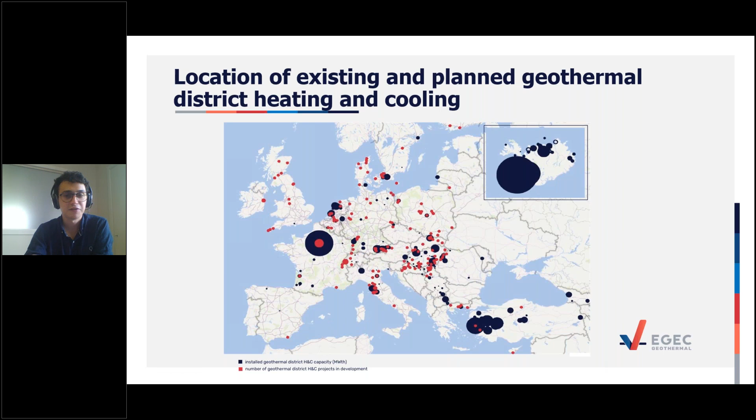So this is a very positive trend. Also, because of the COVID-19 pandemic, we could not report that many positive developments in 2020. A lot of projects were stopped or delayed, and there were very few projects that actually were commissioned during the year. But we can happily report broadly positive trends and diversification of the market overall.

Now, this diversity in the European geothermal market typically translates into a lot of different temperatures used in the geothermal heating and cooling sector. In several countries we have temperatures as low as 20 to 30 degrees fed into use for geothermal district heating and cooling. We can also have temperatures as high as nearly 170 degrees that can even be used for industrial processes. In between we have a whole range of applications - district heating, low temperature, higher temperatures. We also have uses in the agricultural sector for fish farming, etc. So a lot of different uses of geothermal energy.

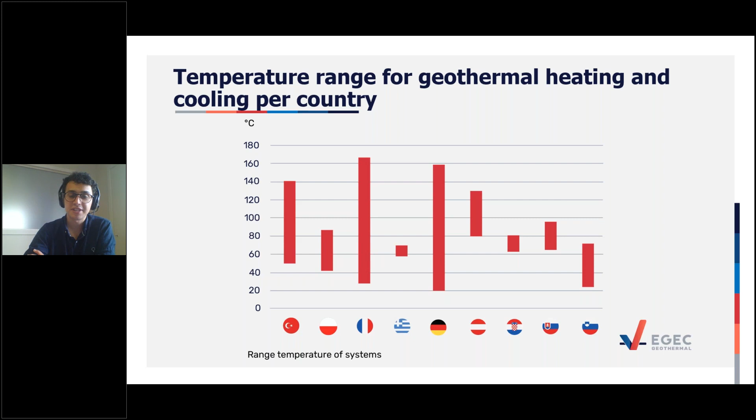We are seeing more diverse uses of geothermal appearing as well, exploiting a wider range of temperature and a wider range of depth. This was one of the observations we had in the previous EGEC market report - that really no depths and temperatures are limiting criteria, at least for geothermal district heating and cooling.

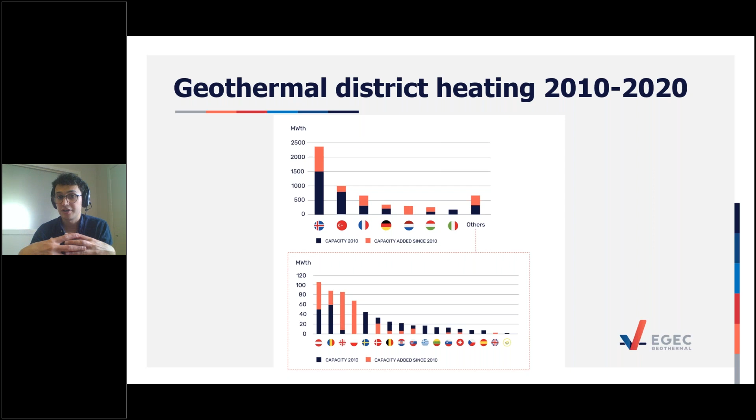What we see is typically countries like the Netherlands really appeared in this space. The Netherlands had very little use of geothermal district heating and is now the fifth largest country in terms of installed capacity and use. Netherlands is quite interesting because capacity factors for geothermal heat projects are quite high, as it's almost exclusively used for agricultural greenhouses. Therefore the plants are running almost 24/7, contrary to district heating and cooling for buildings, where typically we follow the heating loads, and in summer there's less demand.

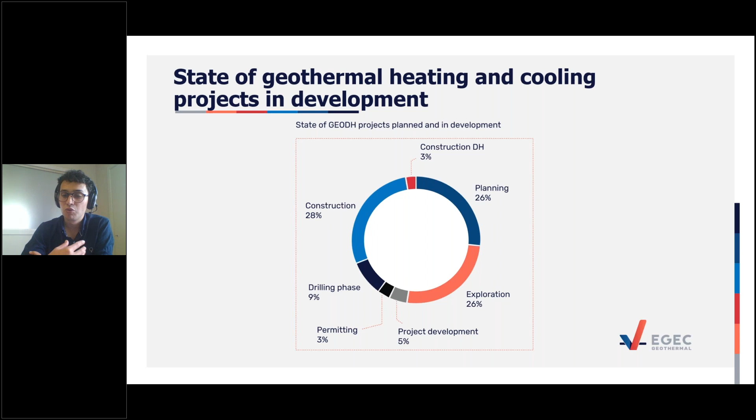So what we really see is that we have means to accelerate planning, exploration, and especially permitting to facilitate the development of projects and accelerate deployment of geothermal projects. What we expect over the coming years, if things go smoothly without disturbance like we had in 2020 and to some extent 2021, such as COVID-19, if we have the right policies and adapt permitting and planning for geothermal district heating, we might see a very rapid doubling of deployment rates for geothermal district heating and cooling, which might still increase at the end of the coming decade.

Now looking at geothermal heat pumps, we'll try to accelerate because time is running out a little. But we had a market that was not quite stable. We have seen a lot of decrease in several countries, typically Poland, with a 14% decrease in sales between 2019 and 2020. This is also true in some other European markets. However, the overall geothermal heat pump market remains quite strong, with about 90 to 100,000 units sold in 2020, bringing the total number of heat pumps installed in Europe to over 2 million, about 2.1 million geothermal heat pumps.

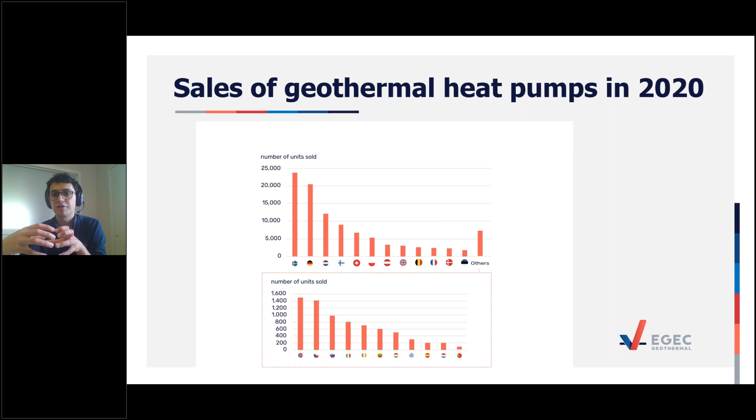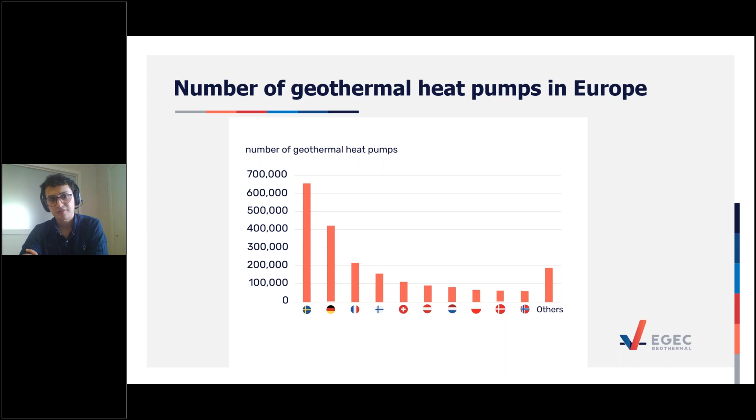What we see really is that very few countries are concentrating the bulk of sales and the bulk of installed stock of geothermal heat pumps. So of the 2 million heat pumps installed in Europe, we have half of them between Sweden and Germany. And what we are seeing is that all those markets have doubled over the past decade. We used to have about 1 million heat pumps in 2010, and we now have more than 2.

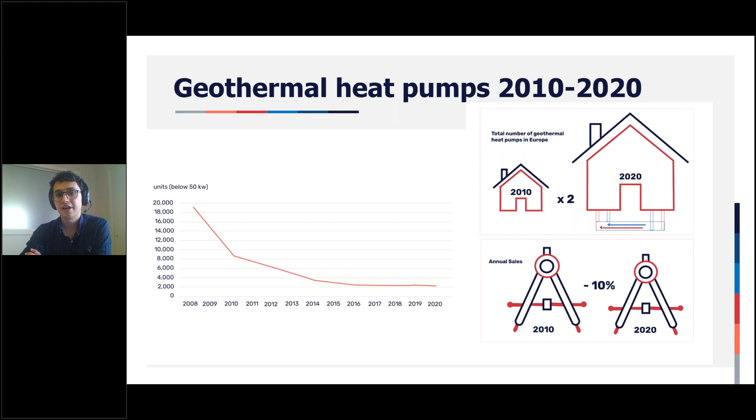Really what we see is that this collapse of the geothermal heat pump market in France was due to regulatory changes, unforeseen changes, and a lack of stability in the permitting and support framework. So really, policy decisions and support schemes have a strong impact on the viability of the market, and its capacity to sustain itself and consolidate until it reaches maturity. Another example, as we will see a little later, is Sweden, where on the contrary we have had a progression of geothermal heat pumps towards strong market maturity, high penetration rates, and a consolidated industry.

Now looking also at the trends in the way we install geothermal heat pump systems, we are typically drilling fewer wells. This is data from very large heat pump systems, so it might not translate directly to individual household heat pumps, but it's probably a general trend that we are drilling deeper wells. We used to have wells at about 100 meters deep; now they are typically 250 meters on average. And we used to have, for the same type of installation, about 200 wells, and now we drill less than 100.

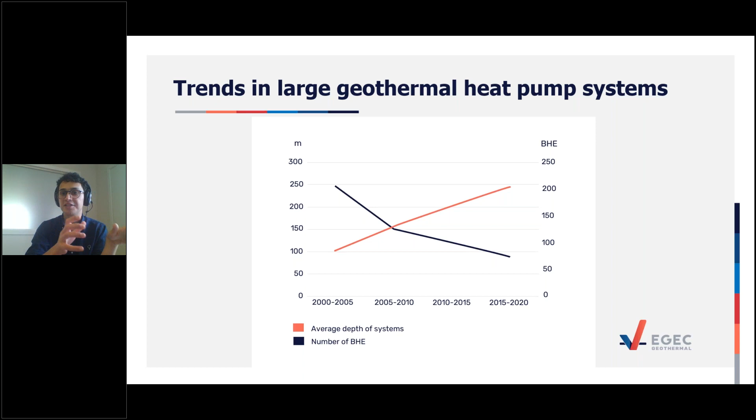So we see this shift towards deeper and fewer wells, which probably translates into it being much cheaper to go deeper and drill fewer wells, because you do not have to move the pad, etc. This means we drill faster and more efficiently, therefore decreasing the cost of systems.

This is a reflection of the importance of policy in really driving the geothermal heat pump market. So we had Sweden and Germany as the only countries that really either exceeded or are close to achieving their 2020 geothermal heat pump deployment targets adopted as part of the EU Renewable Energy Directive implementation. These countries are among the biggest markets for geothermal heat pump development, and also the countries with the highest degree of maturity because there was some degree of stability.

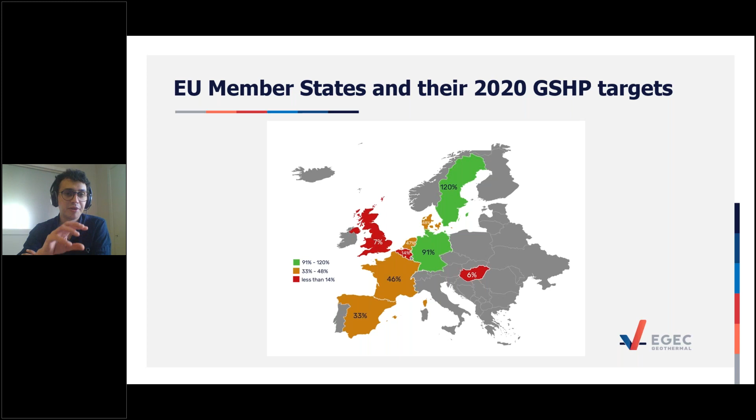Germany's market also was not as strong as in Sweden, but still, despite similar early trends at the beginning of the decade with France, Germany remained a more stable geothermal market.

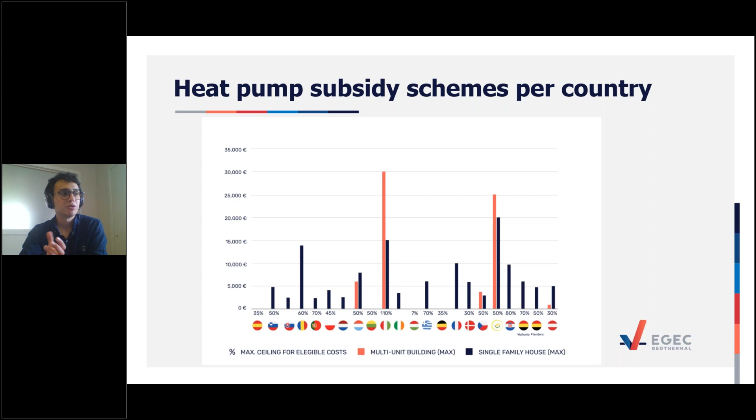Now these slides present a bit of the subsidy schemes available per country. What we can see is really it's quite diverse. We have some countries that tend to prefer focusing on multi-unit buildings, typically apartment buildings, hospitals, etc., and others that prefer to focus on single family houses. Some countries have both. We have very varying rates of coverage of the cost of the geothermal heat pump, so we don't have a very unified framework in Europe, which translates also into a market that is not quite consolidated.

Now, if we look also at penetration rate for geothermal heat pump per household, what we see is really strong differences between countries. A lot of European countries have fewer than 1% of households equipped with a geothermal heat pump. Even countries with quite an important installed stock, such as Germany, have only between 1 and 2% of households actually equipped with a geothermal heat pump.

Then on the contrary, we have countries like Sweden or Finland, where we have between 6 and 12% of households with geothermal heat pumps - 6% for Finland and 12% for Sweden - which is quite a high rate of penetration and really a highlight of the maturity of this technology, especially in a country where we have a lot of district heating, therefore limiting the number of individual systems.

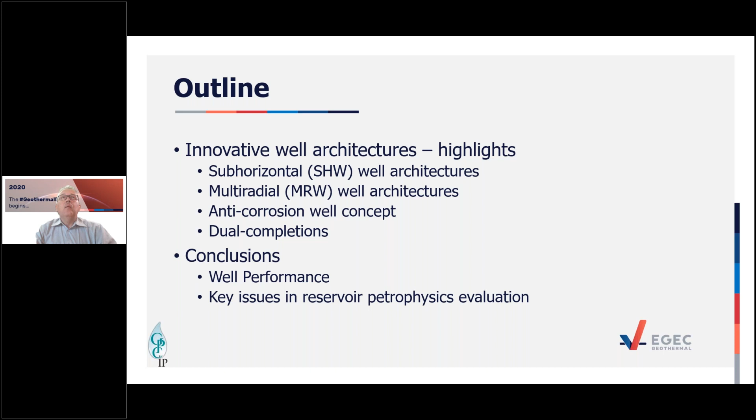So we need to exploit simultaneously two types of reservoirs. In the conclusions, I will tackle well performance and key issues in reservoir petrophysics evaluation, which is related to drilling. However, it's often neglected while developing resources in deep sedimentary basins, because most of the time we assume that we just cross the sedimentary basins, and then we just harness the geothermal resource which is beneath the earth.

Here is a summary slide of all the well architectures which have been promoted in the past. I have not spoken of the classical two vertical wells drilled from two different platforms, spaced at a certain distance in order to avoid thermal breakthrough. I'm starting this summary by presenting the classical deviated wells, drilled from a single platform, intercepting the reservoir at vertical depths between 1600 and 1700 meters, with either an open hole completion characteristic of the Dogger reservoir, or a wire wrap screen completion, more characteristic of clastic reservoirs.

At the bottom of the screen, you will see the first ever achieved concept of a subhorizontal well, which I'm going to detail later. On the right hand side, you will see the design of the multi-radial wells, recently achieved in France by another operator. We have done some work on design, though not specifically the way it has been achieved. I'm just giving you an example.

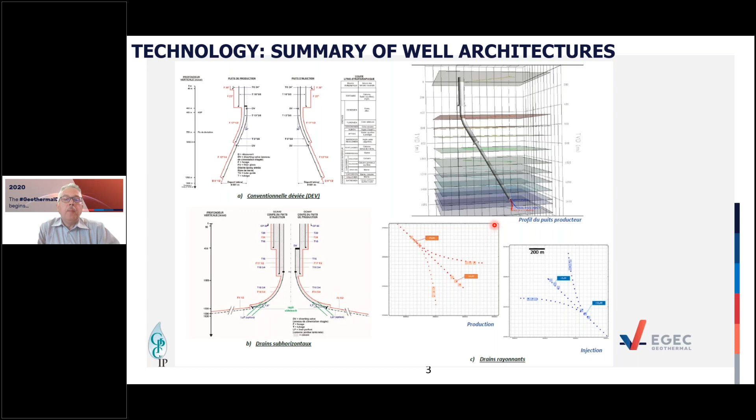Why do we need a subhorizontal well when we already have had an exploitation in the Paris Basin, in a Dogger Bathonian reservoir, which is very productive but exhibits zones with lower transmissivity, below 10 Darcy meters? The objective of this project was in the south of Paris, in Cachan, which is already surrounded — you can see all the doublets surrounding the Cachan perimeter. We are already very crowded, and it was necessary to design new wells in order to replace the existing wells, which were producing since 1984.

This district heating system was supplied since 1984 by geothermal heat, from four wells — that means 2 doublets, having a capacity of 360 cubic meters an hour in total of heat supply.

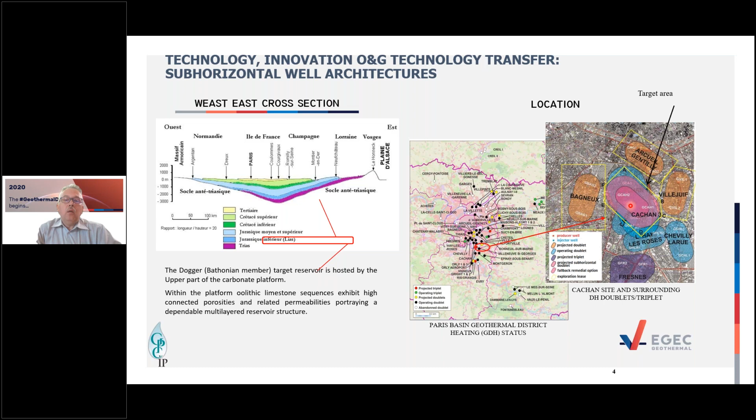By achieving a new subhorizontal well — here you can see the well design, the well construction profile, and on this side the trajectories and azimuths, and on this side the offset well trajectories and the design ones. This is the modeling which has brought us to what has been achieved.

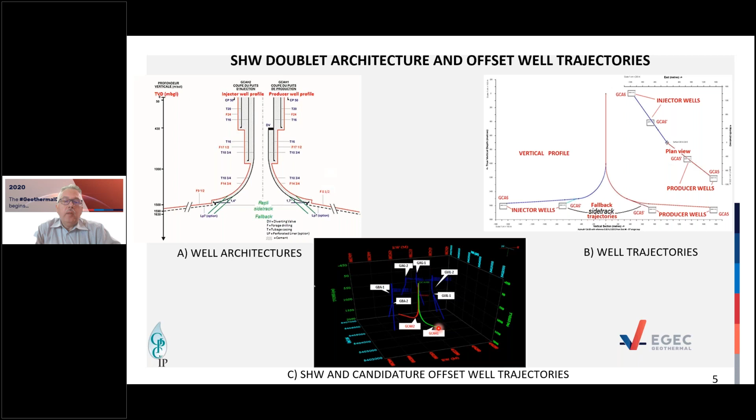The objective was to replace the 2 doublets with one single doublet, and this was carried out successfully by adopting a strategy where, for the first well, we used a constant angle trajectory of 84 degrees, monitored by logging while drilling, by XRD and XRF analysis, by mud logging, and then we applied geosteering. That means we had to keep the tool in the same layer for a while in order to increase the inflow surface into the well.

So, by what our fellows from the oil and gas industry achieved, this proved to be very rewarding, because today the doublet is producing at 450 cubic meters per hour, which exceeded the capacity of the 2 existing doublets, with a reasonable capex.

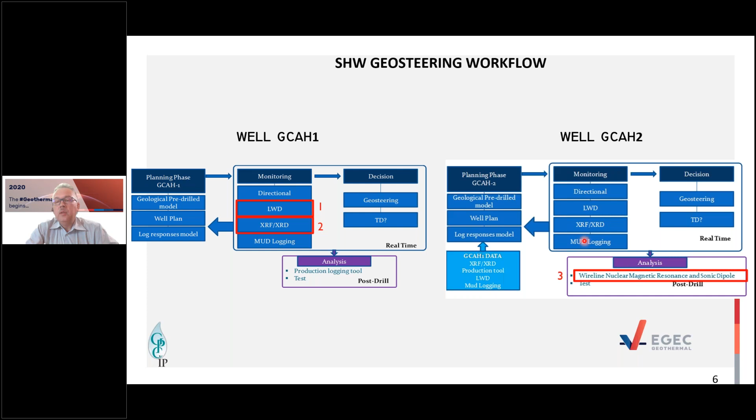The second well was much more tricky to drill because it was going the opposite way, uphill on the dip. The planning and geosteering of this well was much more complicated because we had to keep the tool in metric-sized layers for a long time, and it was the most challenging well because the transmissivity was even lower than in the production well, and it was meant to be an injection well.

So we succeeded well on the production well, but then the question was how to geosteer the second well, which was much more sensitive, in a way that it could take off the production from the production well, so as an injector. We had varying angles between 1 and 5 degrees, and had to track layers of metric size. In total we had 32 variations of angle and dip by geosteering.

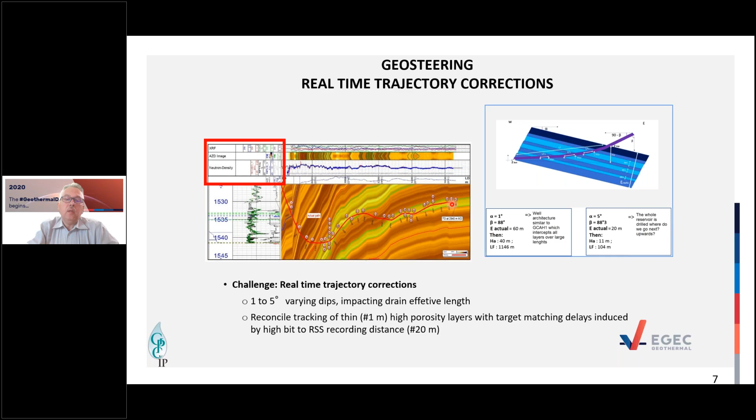That was the first ever thing done in geothermal in the Paris Basin, where we had quite good knowledge, but not sufficient to do that.

Of course, after doing geosteering, we need to do very good reservoir petrophysics characterization. This was done by Schlumberger on this project, and here is the flow chart of how to go from drilling and geosteering by good analysis of nuclear magnetic resonance, which gives broad information about rock quality, productive segments, porosity and permeability, and rock heterogeneity. This was really a rewarding exercise, which brought in a wealth of data.

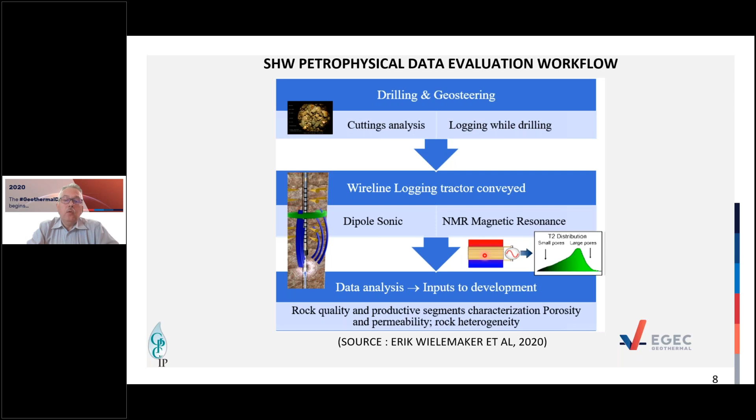For future projects, and how to do them successfully by successful geonavigation and reservoir characterization in order to maximize heat production. Well, the second example will come in presenting the multi-drain concept, where we could demonstrate, as you could see on my previous slide, that we have had a conventional single drain.

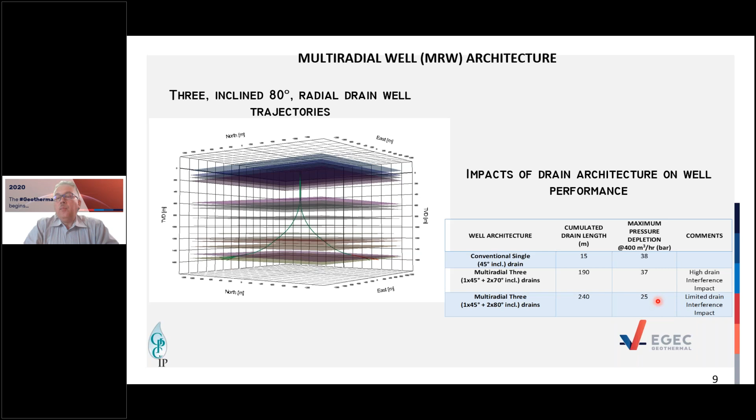This would give an accumulated length of 15 meters with pressure depletion at a high flow rate, also in a very low transmissivity, below 10 darcy meter environment at 38 bars. For a multi-radial three drain system, with one drain at 45 degrees and two at 70 degrees, we would just have a 1 bar gain, but an accumulated length of 190 meters. Should we keep a constant angle of 80 degrees and achieve an accumulated drain length of 240 meters, we would gain approximately 12 bars in pressure depletion, and also have a limited interference impact, as shown in this modeling exercise of multi-radial well versus conventional well architecture performance.

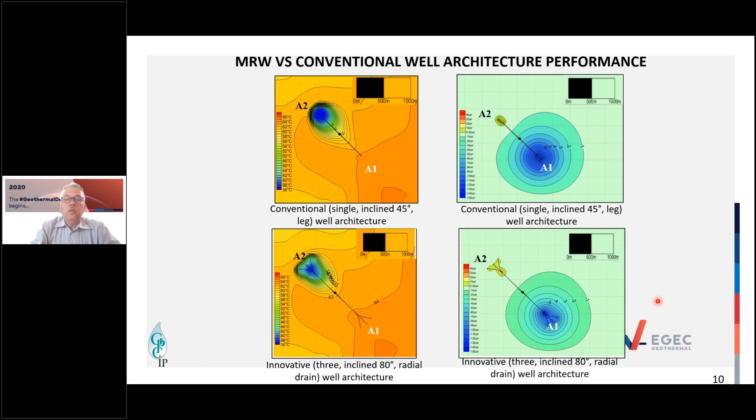Well, a similar architecture, not exactly the one shown to you, has already been achieved in France, which is not yet in service. So I cannot report on that because nothing has been disclosed by the operator so far.

Well, the other innovation, I would say, dates back now 26 years. The first well, the anti-corrosion well concept, was achieved in Melun-l'Almont. It was a fiberglass relined well, drilled as a conventional well with steel prop casing, but in a large diameter, and inside we introduced a fiberglass liner, which is not cemented. It is in free suspension on the lower part and in compression on the upper part.

And the precursor, which I mentioned from 26 years ago, had only one casing, and in 2018 we achieved a replica of that well, but with a pumping chamber. The result was that the well performed so well, and the pressure losses were so low in the fiberglass, that the pump was no longer needed.

However, just to give you a comparison, the old well, which was in production in Bonneuil-sur-Marne at that time, was capable of giving 150 cubic meters per hour. Now the new well, the fiberglass completed well, gives 280 cubic meters per hour from the same reservoir. The distance between the impacts is about 100 meters, so we have targeted the well at the same place.

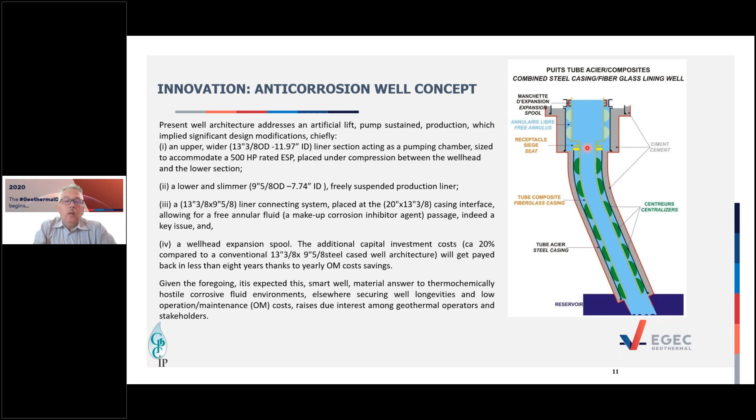Well, the advantage of this well is that it's a zero maintenance well, and it does not need a downhole chemical injection line to protect the casing from corrosion and scaling, as is the case in many wells, not only in France but also in Europe, and it can last for a very long time, as already proven in practice. This well was put into service in 2018, and it has operated stably since then.

So, of course, the production of these two waters is not going to be mixed; each water will give its own heat to its own heat exchanger, and it will be reinjected into the well, into that respective reservoir.

The only problem today with these reservoirs, the Albian and the Neocomian, is that they are clastic reservoirs and they exhibit quick clogging. That means the injectivity of these wells degrades very quickly due to particle migration and internal cake formation. A research program is ongoing on this topic, and we are confident that solutions will be adopted soon.

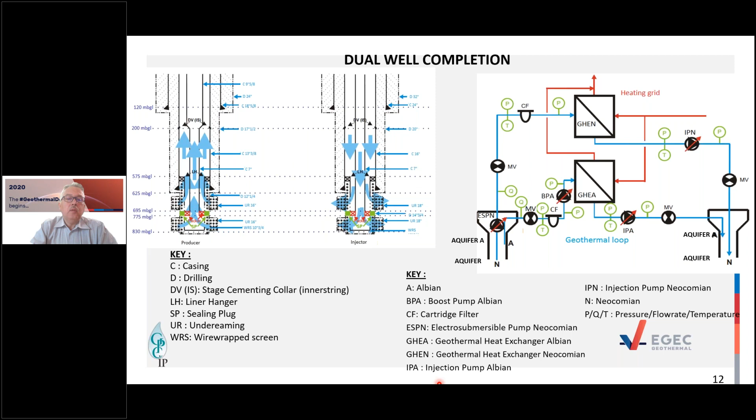This is another technology borrowed from the oil and gas industry: the expandable liner. More and more we have to target deeper reservoirs, because existing reservoirs either lack sufficient productivity, or we need deeper reservoirs to complement the heat capacity of the existing reservoir with one that has higher temperature.

This has been a design which has been designed and almost executed - I must say almost, because there was a technical problem and it could not be achieved - to exploit a deep reservoir, the Triassic sandstone reservoir in the Paris area, and also give the opportunity to exploit it by a dual completion.

The idea was to put an expandable liner in order to maintain the same diameter between the completion of the Dogger reservoir and the top of the Triassic reservoir, so we would not lose diameter and not lose flow rate, because reducing the diameter of a well causes loss of flow rate.

What we should retain from geothermal exploitation is that we are not producing via tubing, we are producing by full bore from every reservoir, and the geothermal water is in contact with the casing. Therefore, well integrity is crucial.

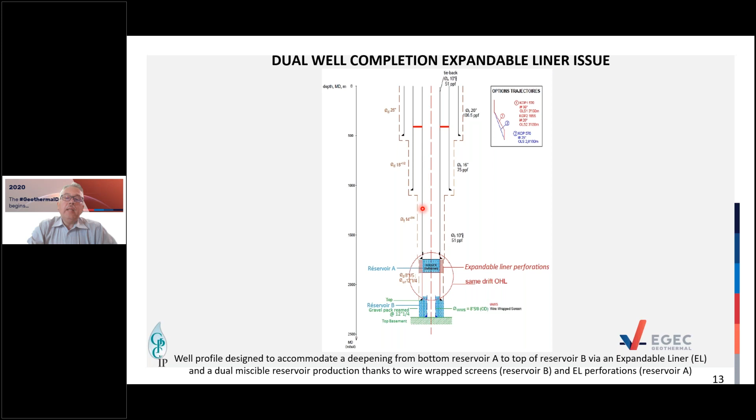This is the application which has been designed through the expandable liner solution, but it has not been implemented because this exploratory program did not succeed.

We worked closely with Schlumberger to have dual production from the Dogger and from the Trias. There have been two systems proposed: the dual parallel and the dual concentric electrosubmersible pump. This has been a big challenge because it has never been done - it is very often done in oil and gas, but never in geothermal.

For this target flow rate, we were targeting 450 cubic meters an hour: 150 cubic meters per hour from the Trias and 300 cubic meters per hour from the Dogger. Achieving this with two pumps, mixing the waters, was quite a challenge for all the designers involved in this project.

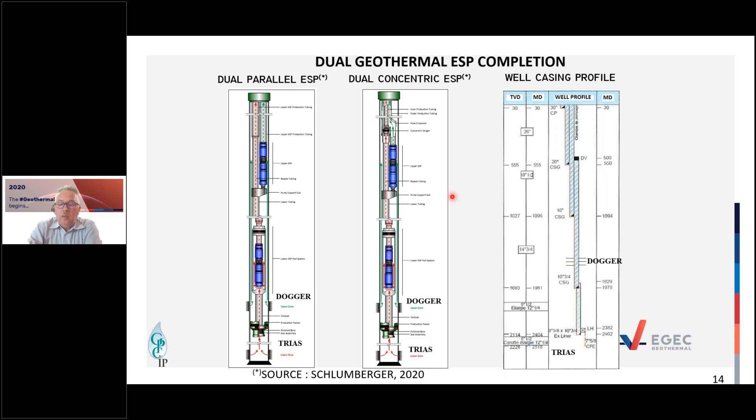We were very happy to have this on the shelf now, with the technology available. That means that in the future this type of application can be easily achieved. I'm coming now to the conclusions because I think I'm exceeding my time.

For subhorizontal well architectures, if we compare the capex for the previous doublets - producing in total 350 cubic meters per hour, that is 40 gigawatt-thermal per year - the capex to remake the same would be between 14 and 15 million euros, but the COP of the system would be only 9.

With the new design, achieving 450 cubic meters an hour and a capacity between 60 and 65 gigawatt-thermal a year, we achieve a COP of 20 to 28 with an expenditure of 12 to 13 million euros. So there is a reduction in cost, but we have a huge increase in performance.

If we look at multi-radial well architectures, as I mentioned, the more inclined we land on top of the reservoir, the quicker we can space the drains to avoid interference - not only at the top, but also within the drain itself at the end, so we do not intersect the same reservoir twice.

We can achieve substantial gain in pressure depletion, which will ultimately lead to gains in the OPEX of the well, in electricity consumption, in order to produce high flow rate for a low transmissivity reservoir.

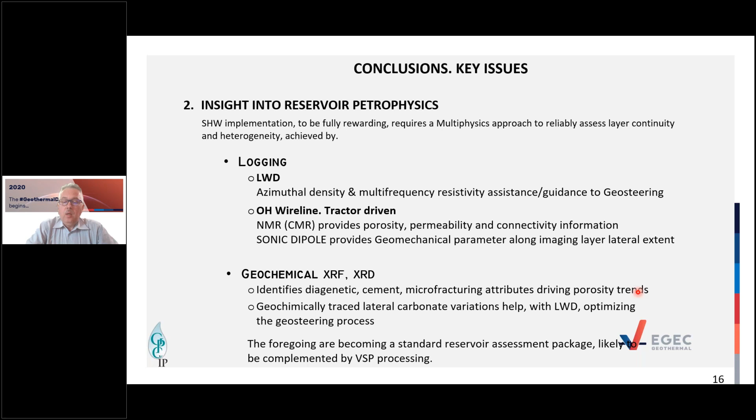And we can obtain reliable geomechanical and reservoir parameters. What is important is that we deploy geochemical analysis in order to characterize the facies in which we are drilling, the type of sedimentation. So we are steering our well or drill bit into the layer which has the best chance to be productive.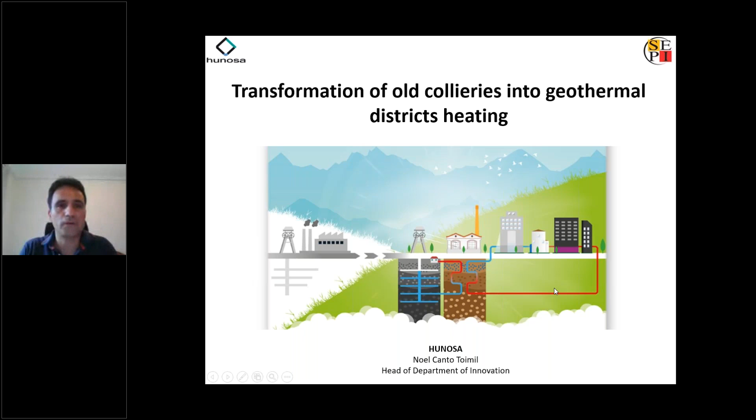HUNOSA is our own state coal mining company that was founded in 1967 by the integration of private coal mining companies. From the beginning, it was focused on coal extraction, both underground and open pit mining, and also energy production. We are located in the north of Spain, in Asturias, a region with a strong tradition in coal mining and also in iron and steel industry.

Nowadays, HUNOSA, as many other coal mining companies in Europe, has undergone a strong process of reduction in the number of employees and also the number of coal mines in operation. Now we have just one underground mine in operation, a power station equipped with a CO2 capture plant, a washery, that is a treatment plant, and some diversification activities. Among them, and the most important one, is the geothermal projects developed using mine water.

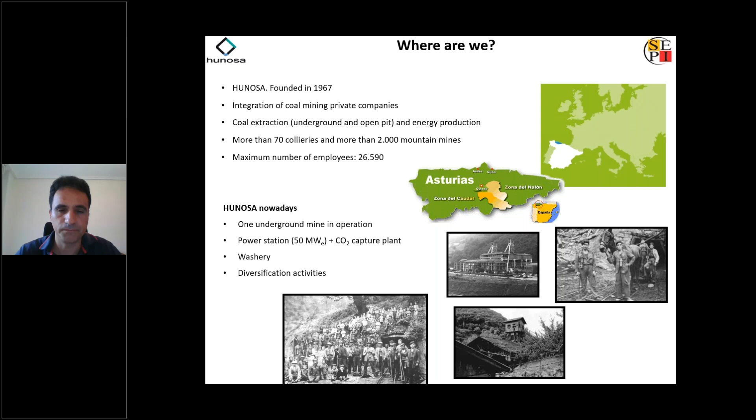We started with geothermal projects because we wanted to find a new use for the mines and for the water inside them. When we close a mine, we stop pumping, and the mine floods, with the water level rising up to a safety level that we want to maintain in order not to damage buildings and infrastructure in nearby towns. This implies permanent costs associated with pumping. Geothermal projects are a way of offsetting these pumping expenses, while also developing renewable energy and creating jobs associated with green technologies.

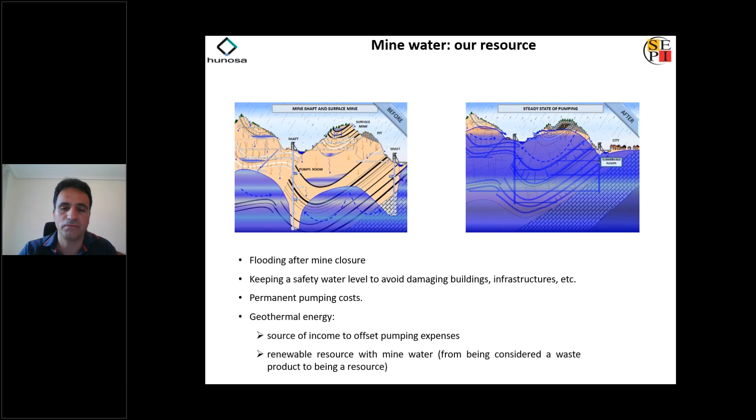So the geothermal projects we have in HUNOSA nowadays are linked to two shafts, two collieries. The first one is Barredo Colliery, and the other is El Fondón Colliery. Barredo Colliery was the first, where we started with all the projects.

It's a mine located in the middle of the town called Mieres, one of the main towns of the mining area in Asturias. It has about 40,000 people, so it's not a very large town, but it has a lot of potential clients very close to the mine, which is why it's very interesting in terms of developing geothermal projects.

So we started in 2008, 2009 to study this kind of projects, and we developed three projects that started operation in 2014 and 2016.

These 3 projects are the Hospital of Mieres, so we provide heating and cooling to the hospital, also heating and cooling to the research building of the University of Oviedo, that has some facilities in this town, in Mieres, and also to the Asturian Energy Foundation building. So these 3 projects are independent. They have in common just only the fact that they have the same source for the heat, the shaft, but they are not connected.

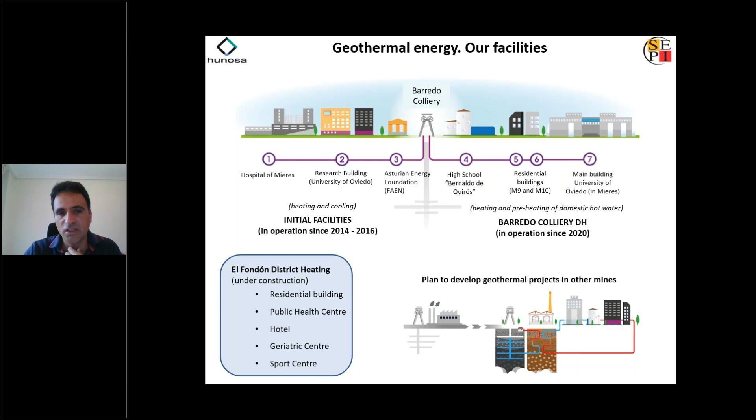We think that in the next years we will develop more district heatings in the same way that we have in these 2 towns. So let's focus now on Barredo Colliery. Barredo Colliery, as I said, is a shaft that is in the middle of this town, Mieres.

You have here in the left part a scheme, a picture where you can see the development of the geothermal facilities. This is a picture of the south part of the town. In orange, you have the first facilities: the hospital, one of the buildings of the university, and Asturian Energy Foundation. And in purple, you have the district heating, Barredo district heating.

On the right part, you have some characteristics of the mine. I'd like to talk just only about the amount of water that we are obliged to pump every year in order to keep the water level. This amount is very large, here it is 4 million cubic meters. In total, in HUNOSA, we have to pump out water from the mines, 35 hectometers cubic per year. So it's a huge amount, and you have to spend a lot of money.

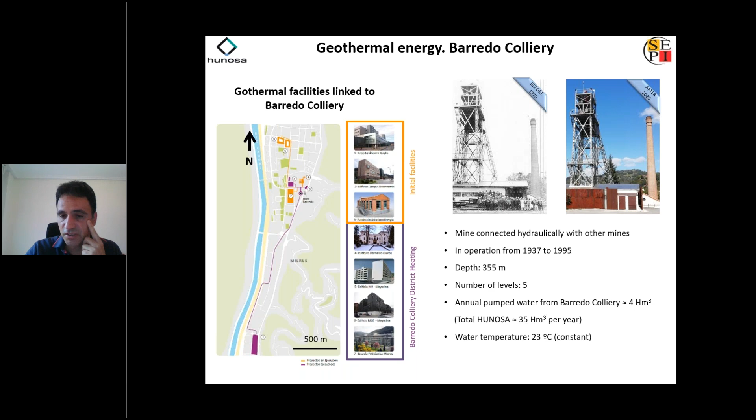So the water temperature associated to this mine, to the water that we have to pump out, is 23 degrees centigrade, and it's very constant during the whole year.

So here you have a very simple scheme about the 3 initial facilities that we developed in Barredo Colliery. As I said, they are individual facilities. They are not connected, and they have in common just only that they take the resource, the water, from the same place, the Barredo Colliery.

So the way of working is very simple. We pump out the water, and before going to the river, we pass this water through a heat exchanger, and we transfer this heat to a closed circuit of clean water that goes to the facility, for instance, to the hospital. In the hospital, we have 3 heat pumps that are in charge of raising the temperature of the heating system of the hospital, or cooling the hospital, depending on the needs of the facility.

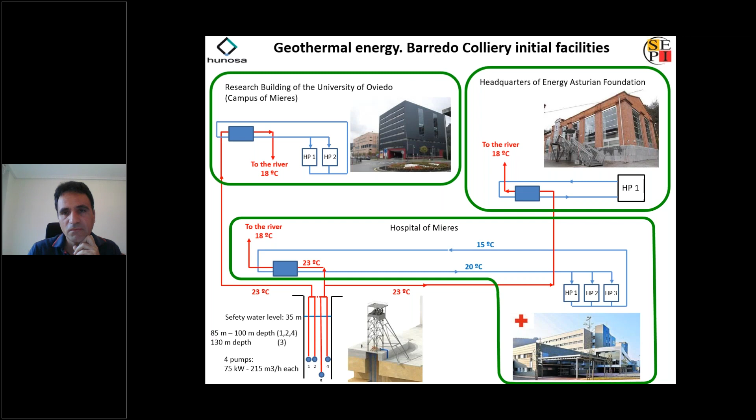So all of them work in the same way. As I mentioned before, developing these first facilities, we thought that it was a very good idea to develop a district heating. So we started to work on that, and we have this district heating developed and in operation since 2020. The way of working is quite different from the others.

We have 2 circuits: we have two heat pumps connected in series and counterflow, and 2 circuits, the evaporator circuit and the condenser circuit. So once we pump out the water and pass it through the heat exchangers, we transfer this heat to the evaporator circuit.

With the evaporators of the heat pumps, we extract the heat and give this heat to the condenser circuit, which is in charge of raising the temperature of the system. As you can see in the slide, we have two lines: one line of high temperature that goes to the secondary school and to the university, and another line of low temperature that goes to the blocks of apartments.

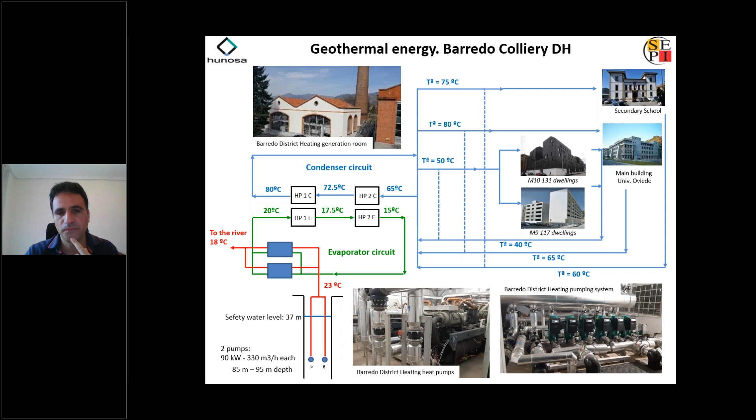So we have another district heating that we are finishing nowadays, and we want it ready by the end of the year to provide heating in the next season. In this case, we are in another town very close to the other. This town is called Langreo. As I said, it's more or less the same size, 40,000 people living there.

And we have many clients, many facilities where we can provide heating. So we are in the first phase. We think that in the future there will be more buildings and more facilities that can join the district heating. But nowadays we are finishing just to give heat to a sports center, a block of apartments, a hotel and geriatric center, and a public health center.

So the temperature of the water is more or less the same, about 23 degrees centigrade during the whole year. And we have to pump out water, about 1.7 hectometers cubic per year.

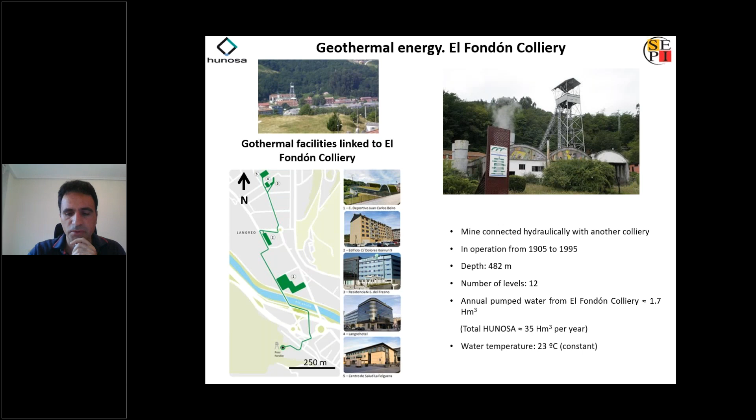So the scheme, the way of working, is more or less the same as in Barredo Colliery. We have to extract the water from the shaft and transfer this heat to the evaporator circuit, and from there transfer this heat to the condenser circuit, and from there to the different facilities. In this case, we have to provide energy at high temperature in all the cases.

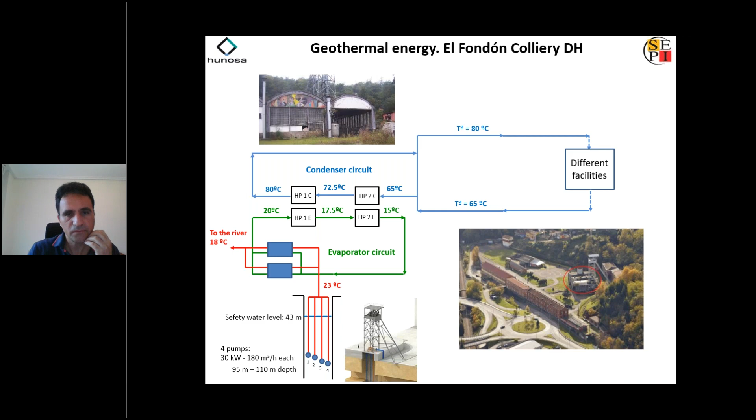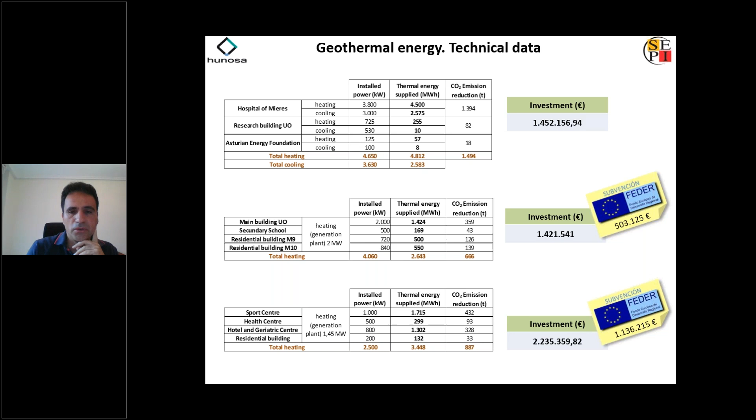I'd like to point out that we use renewable energy for the electricity that we need in the facilities. So the reduction of CO2 emissions is much higher than if we used conventional electricity. You also have some figures about the investment and the subsidies received from the European Union to develop this project.

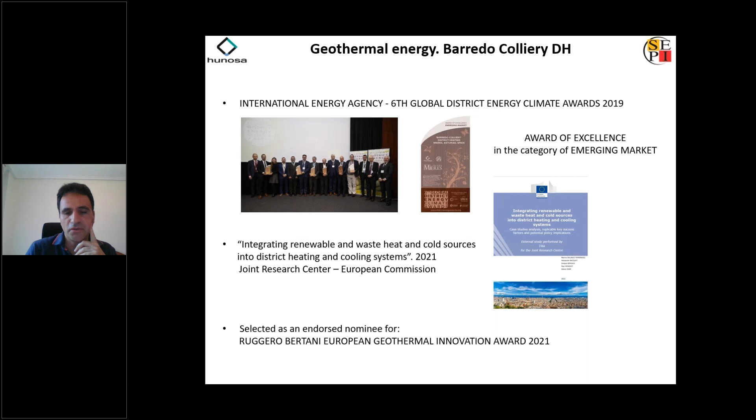I'd like to say also that the Barredo Colliery district heating was awarded in the 6th Global District Energy Climate Awards in 2019 by the International Energy Agency, and was also selected to take part in a report at the European level in 2021, this year, and was selected as an endorsed nominee for the European Geothermal Award also this year.

Thank you very much for your attention. That's all.